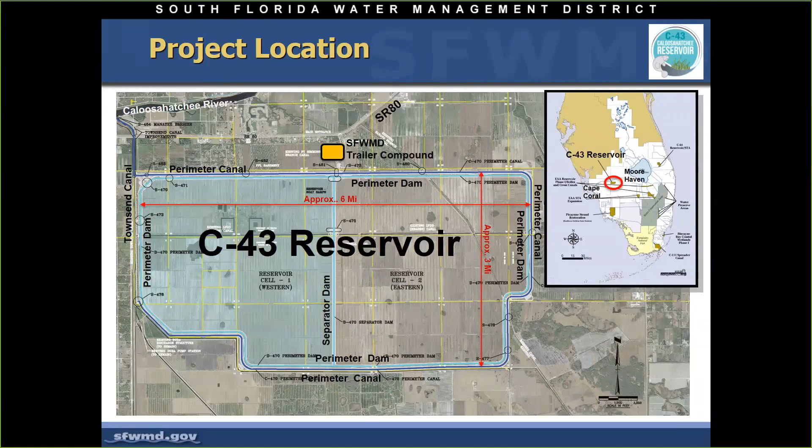The purposes of the C43 reservoir as authorized is to capture excess basin runoff and releases from Lake Okeechobee. That will be primarily during wet season, unless we have an unusual storm during dry season, in which case we would also capture if we have available storage. The intent is we will grab it and store it when there's excess flows, and then when we get into dry season, we will hopefully be able to release water to the degree that it actually improves the timing and quantity of fresh water flow to the Caloosahatchee estuary, the goal being to improve that fresh saline mix so that we begin to restore that habitat back to a healthier system.

In addition to those two purposes for the reservoir, we also have the purpose of maintaining allocated water supply to the local agricultural areas. That will not utilize reservoir water to do that. We will actually do that via the perimeter canal. We will pull water out of the Townsend Canal, put it into the perimeter canal, which will then be the vehicle by which we deliver those permitted agricultural uses.

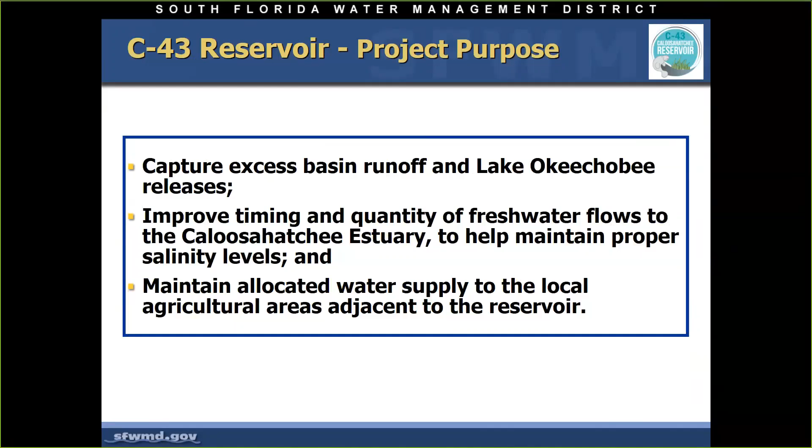In terms of background, we started this project when the Comprehensive Everglades Restoration Plan began. That means we started planning in basically 2001. The project implementation report, which lays out what we're going to do, why, and gives a good cost estimate, was approved in 2010. That was done concurrently with the initial design documents completed in the 2007-2008 timeframe.

We did have to update those designs before we could go to construction because of changes in regulation, not because of anything else. The actual project was authorized, not appropriated, but authorized by Congress in 2014, and we signed our project partnership agreement with the Corps of Engineers in 2016. We actually started work prior to signing that agreement, in 2015. Through the authorization, the entire project is part of the federal project.

In terms of the actual components of the project, there's the reservoir itself, which is 10,500 acres and will hold 170,000 acre-feet of storage. It's got two cells because we put a separator dam into it, so when the wind starts to blow, we don't get a lot of wave run-up that could damage the dam itself. There are 19 miles of embankment, including perimeter as well as the separator dam.

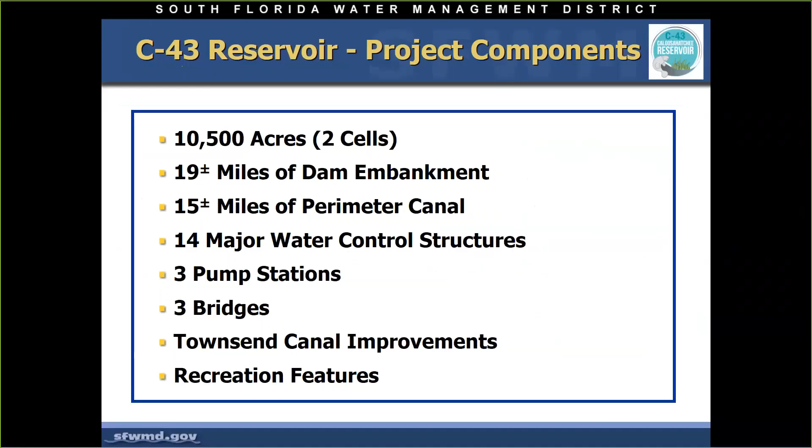Unlike any of the other CERP projects, this one does have authorized recreational features associated with it, so we will be constructing recreational features as part of the project. That recreation will primarily be hiking, biking, and kayaking in the perimeter canal. There will be a boat launch into the reservoir, however it will only be accessible when there's water in the reservoir. There will also be an information kiosk, and shelters along the top of the dam so that if you get caught in a rainstorm, you have a safe place to go.

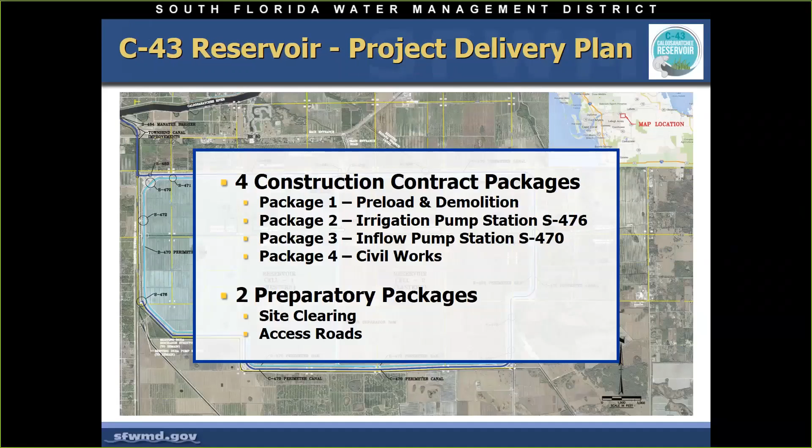Project delivery: in order to move this project forward to construction, we broke it down into 4 construction packages and 2 preparatory packages. Now I'm going to go through each one of those individually.

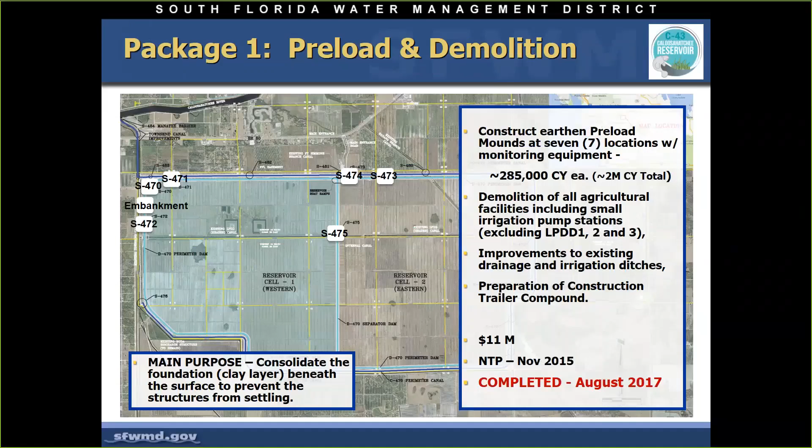The first one is preload and demolition. It was originally issued in 2015, and that work was completed in late summer 2017. The function and purpose of the preload and demolition contract was to get rid of all the different sheds and pump stations, et cetera, that were on the site. This is an old agricultural site, so we had a lot of infrastructure that had to be torn down and removed. We took care of all of that.

In addition, we built what are known as preload mounds. We constructed 7 of them, actually 56 feet high - the highest spot in Southwest Florida. They're slowly coming down, but it was the highest spot in Southwest Florida. On a clear, cold day, you could see all the way to Marco Island. So it was kind of interesting.

The whole purpose of these mounds is that there's a clay layer underneath the reservoir, which is exactly why we chose this site to construct an above-ground reservoir. However, clay, unlike sand, holds water, and when you start putting weight on it, it will compress. In order to have it compress where we are constructing structures within the dam itself, we wanted to make sure we compressed it before we started constructing the dam, so we didn't build a dam only to have a structure drop 4, 5, 6 feet below where we wanted it to be sitting. That's the primary intent of the preload package.

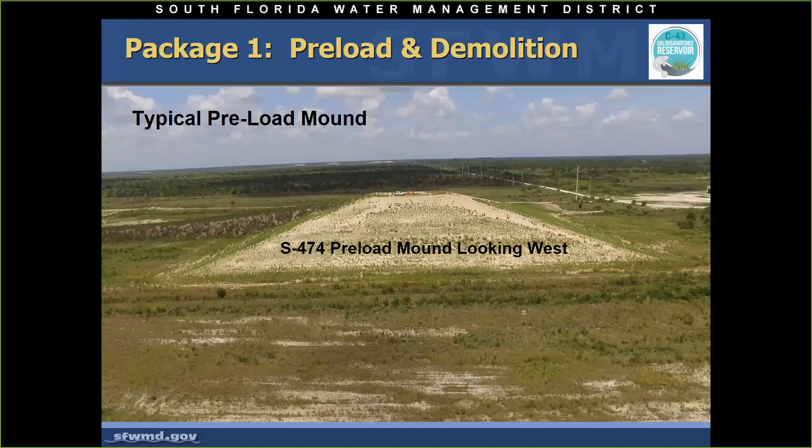The second package was the irrigation pump station - the pump station that I mentioned earlier that would pump water into the perimeter canal in order to deliver agricultural supplies permitted to adjacent landowners. In addition, the perimeter canal serves a couple other purposes. We are actually bisecting what's known as the Roberts Canal, so we are grabbing it, putting it into the perimeter canal, routing it around the east end of the reservoir, and then putting it back into the Roberts Canal in order to maintain historical flows there.

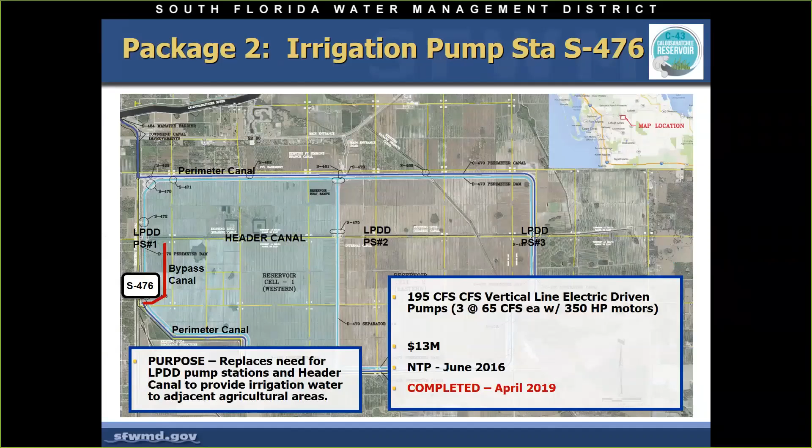The small pump station is 195 cubic feet per second, located in the southwest corner of the project along the Townsend Canal. The notice to proceed for this project was in mid 2016, and it was just completed in April. So we are making progress on the reservoir - it's just that we're doing it in pieces.

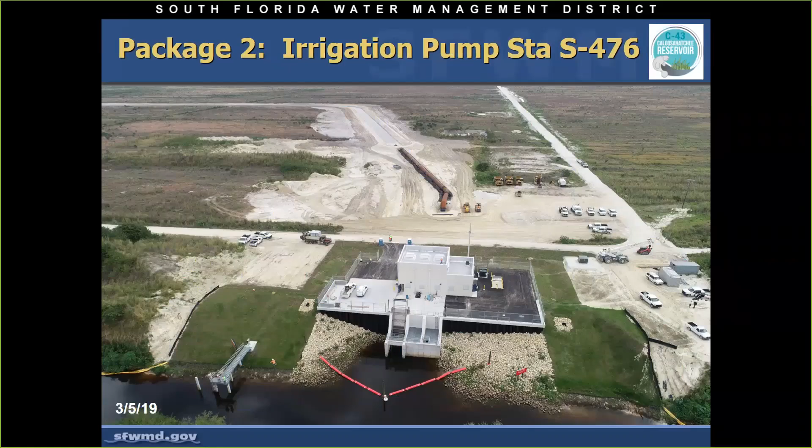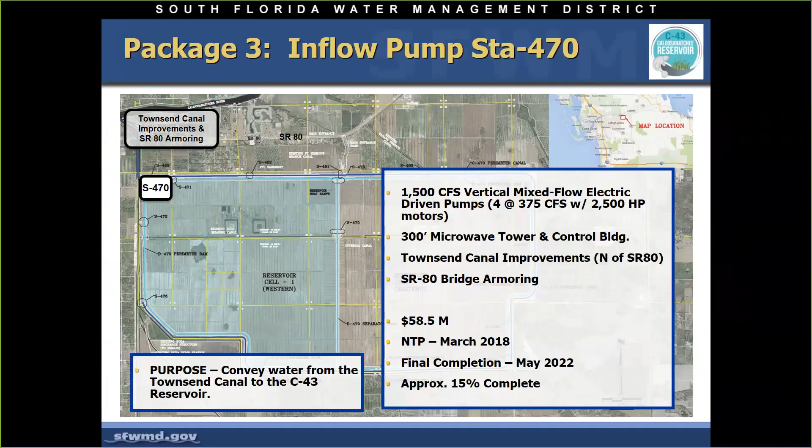The third package is actually what we call the inflow pump station. That's our big pump station that will lift water out of the Townsend Canal into the reservoir itself. Why are we using the Townsend Canal? Because the property that we acquired is along the Townsend Canal, which is directly fed by, or directly feeds to, the Caloosahatchee River. So we're only about, I would say, not even a mile, maybe a mile up from the river. So the inflow pump station, we let that contract in early 2018 with a notice to proceed in March.

This large pump station is in the northwest corner of the project site, and as you can see, there are multiple pieces and aspects to it. Because we don't want different materials of different kinds ending up in an area where they're not best suited for, we actually have to separate all of the material, hence all of the stockpile points.

This is the actual station site itself. And then the intake will be right here into the Townsend Canal, which is here. This is north, so the intake will pull water right out of the Townsend Canal into the reservoir, which will run right here. And then this is the north boundary, and this is the west boundary.

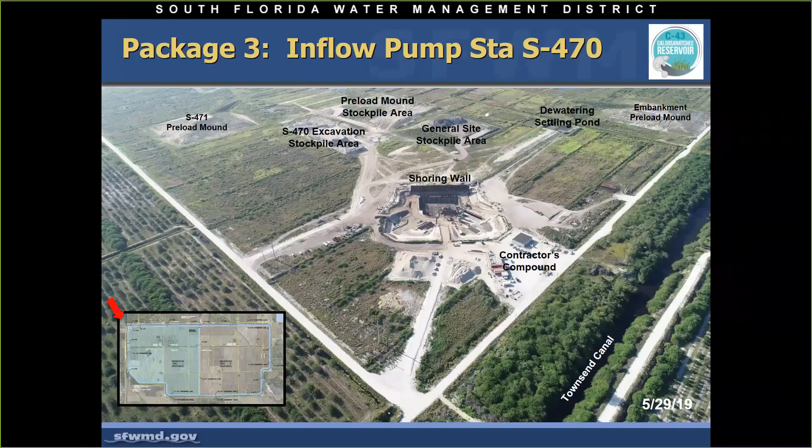And this is a more current picture, this was just taken last week, actually. This dark area right in the center is the portion of the pump station that will be below ground. Our pump stations, when we build them, for those that have never experienced going into one, you'll see a whole lot of concrete above ground, but there's an equal amount of concrete below ground. So they're very large structures.

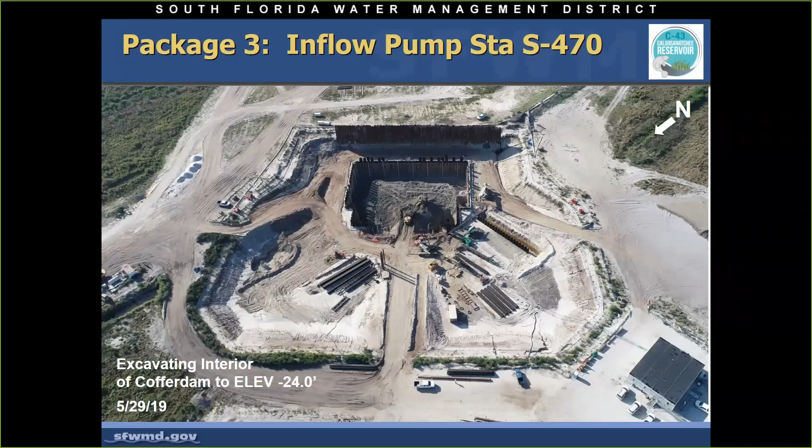In addition to building the inflow pump station, we are actually having to do improvements to Townsend Canal. Why are we having to do improvements? Because we're going to be pulling a lot more water through the Townsend Canal than currently is pulled through it. We are sharing the canal with an agricultural area, so it's critical that we not disrupt their ability to withdraw water as they are legally permitted to do, or to discharge water as they are legally permitted to do. So that's a critical aspect.

So in order to ensure that if we ever had to pump at the same time for some reason, which is highly improbable but could happen - because remember, they irrigate in dry season typically, and we will be releasing water in dry season - however, we won't have to worry about them getting that water, because we will operate such that they aren't pulling water at the same time that we're releasing water. So that is a concern that we will handle operationally. And during wet season, we'll be filling water, and they're most likely to be discharging water at that point.

This is State Road 80, this is the Caloosahatchee River, and this is construction that's just about to finish up in terms of the north portion of the Townsend Canal.

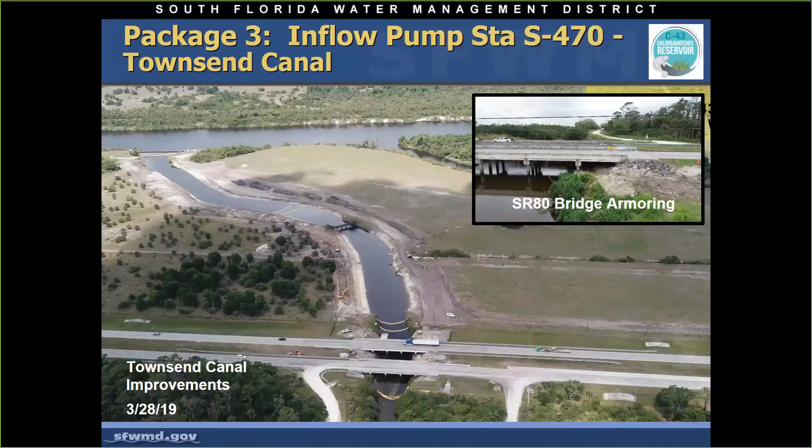This weir structure is currently being demolished, and we are doing reinforcements underneath the State Road 80 bridge, because we will be increasing the capacity to the maximum design capacity of that bridge, and we will also be doing considerable riprap, etc., shoring up so that the flows don't create any problems for the bridge itself.

I mentioned we had two preparatory contracts as well. Preparatory contracts are for the actual dam construction, they weren't needed for the pump stations. So the preparatory work's intent was to clear the site of all the trees, etc. We cleared all of the citrus off, probably in 2009 I believe it was. But in the meantime, all kinds of cabbage palms and small oaks, etc., grew up on site.

So we actually had to clear the site again. So in order to make sure that wasn't a responsibility of the contractor that won the dam work - we wanted them to go straight to work doing the dam itself - we went ahead and issued a contract to help clear the site. In addition to site clearing, we had two specific areas there.

This area and this area actually had to be remediated. There were old agricultural chemicals there in such a concentration that it had to be removed. That work has been completed as well.

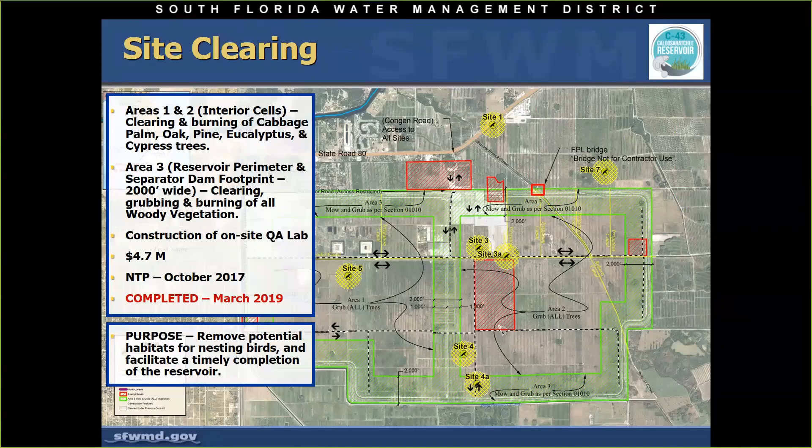This area, we discovered or were told about barrels that were buried there. You can imagine the panic in our hearts when we heard that there were barrels buried there. We had a contractor go out and assess the barrels, and we were most grateful that they were barrels used to import frozen concentrate back in the 80s, or maybe early 90s, when there was a particularly bad freeze. There's a juice plant just to the north of us, so they imported concentrate to produce juice, and that's where they buried the barrels. That was quite the relief for us. We did have to get rid of the barrels, though, but at least it was just concentrate.

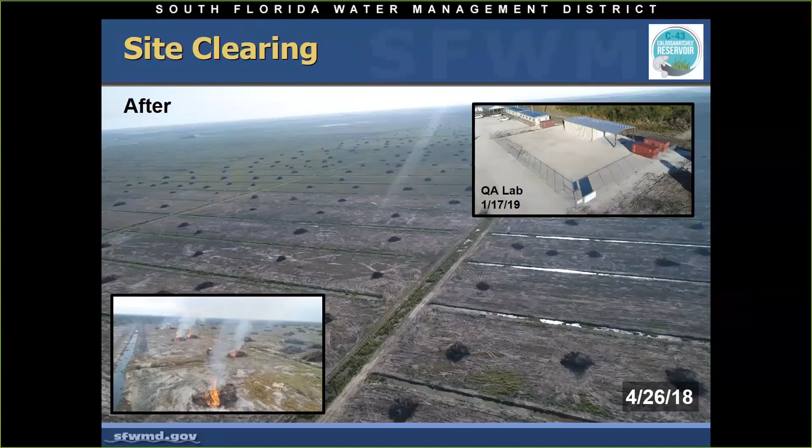In addition to the site clearing, once we got the site cleared, we decided it would make a lot of sense to go ahead and put in access roads. The only way to access the site was through basically two-rut roads through lots of sugar sand, real prone to getting stuck. So we had about 16 miles of shell rock road put in that allows the dam contractor to move all of his equipment around and get to the various parts and ends of the site. As I was told at lunch today, we actually do have a posted speed limit because of a wealth of threatened and endangered species on site that we have to be very careful of and manage for. So it actually takes an hour to drive the boundary of the site. It's a huge site.

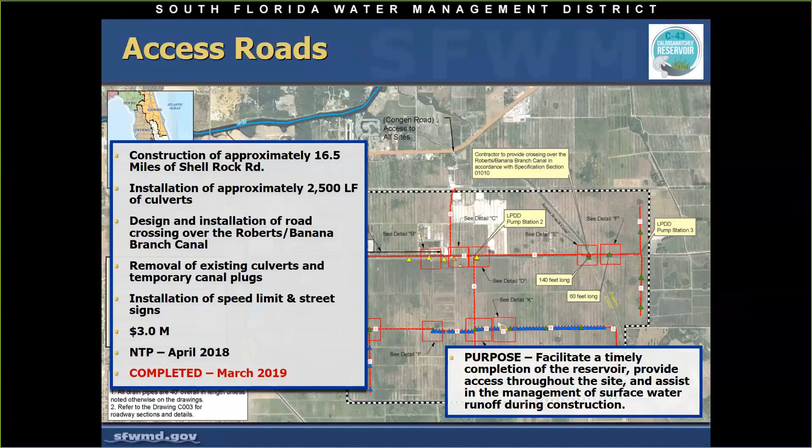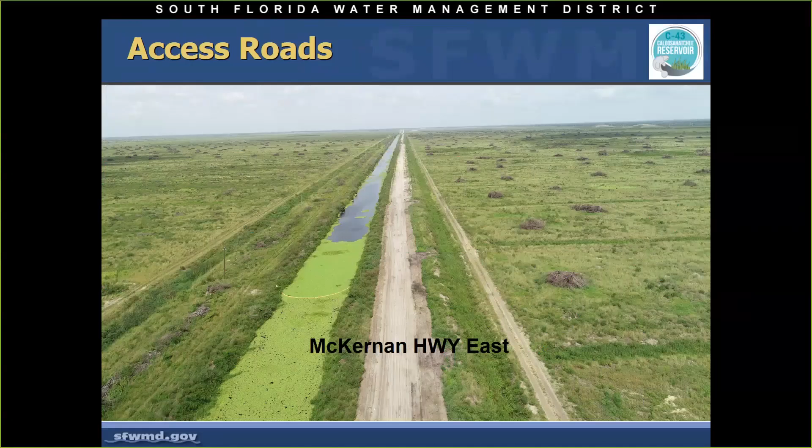In addition to putting in the shell rock roads, the contractor did remove some additional vegetation that was identified as needing to be removed. That is actually the comparison of what was there versus what we have there now. And this is actually aquatic weeds, not algae.

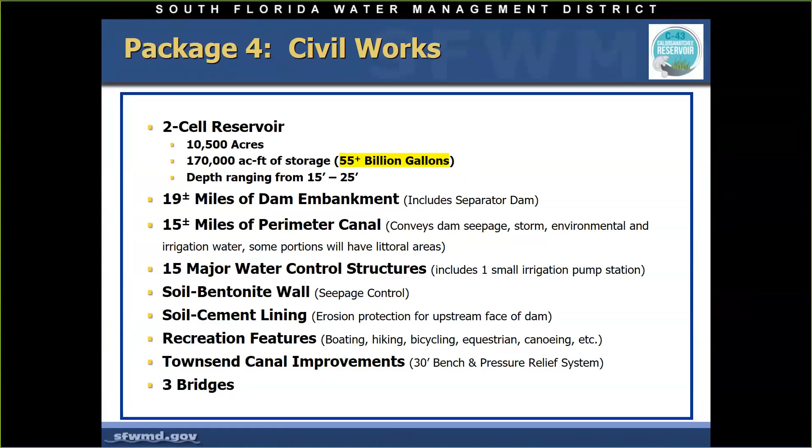Okay, so the big important package is the actual dam construction itself. As I mentioned earlier, it's 170,000 acre-feet of storage, for those that can't understand what that is—and trust me, it's taken me a very long time to understand what acre-feet of storage really looks like. It's 55 billion gallons of water. This contract was actually issued back in March, and the notice to proceed, which means the contractor's mobilizing to site, was actually on Monday.

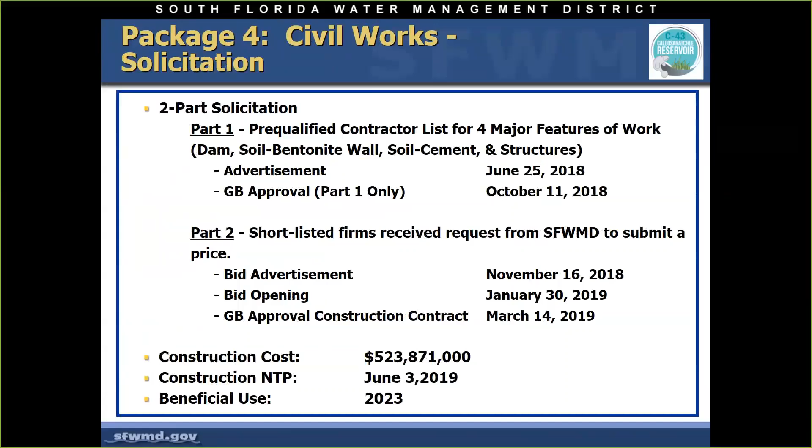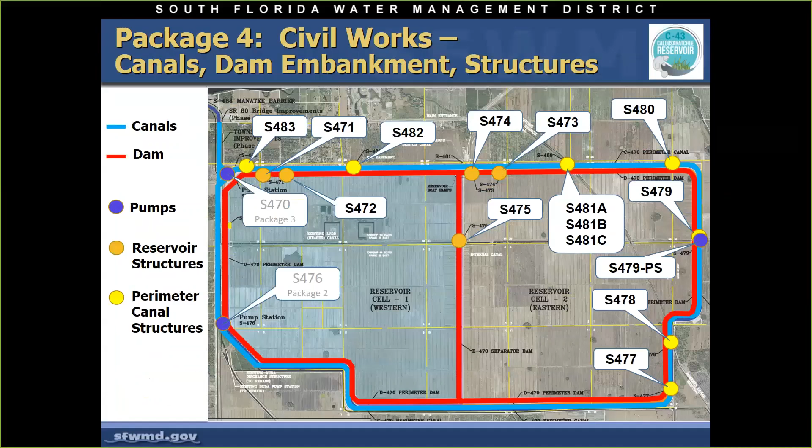Oops, wrong way. Roland.

Good afternoon. Thank you very much for giving me the opportunity to talk a little bit about what Lee County is doing in terms of projects in the Caloosahatchee Basin. As far as their applicability or scalability to the C43 reservoir water quality component, that remains to be seen, but at least it gives an idea of some of the things that can be done in the basin on a much smaller scale.

So we're going to go through this—you've seen a lot of the water quality impairments and sources of pollution, such as what we're looking at most of today, so I'll briefly go through that. We'll do a little project tour of some of the projects we've done, and then there will be a slide on some observations we've made.

As you've seen earlier, Caloosahatchee is impaired not only for nitrogen but also fecal coliform. We have the TMDL and the Basin Management Action Plan, which dictates a lot of the water quality initiatives in Lee County. We also realized that identifying the sources is very important, so we've done joint work with DEP as well as Harbor Branch for on-the-ground truthing, water quality sampling, groundwater sampling, and surface water sampling to get more definition of where the problems are coming from.

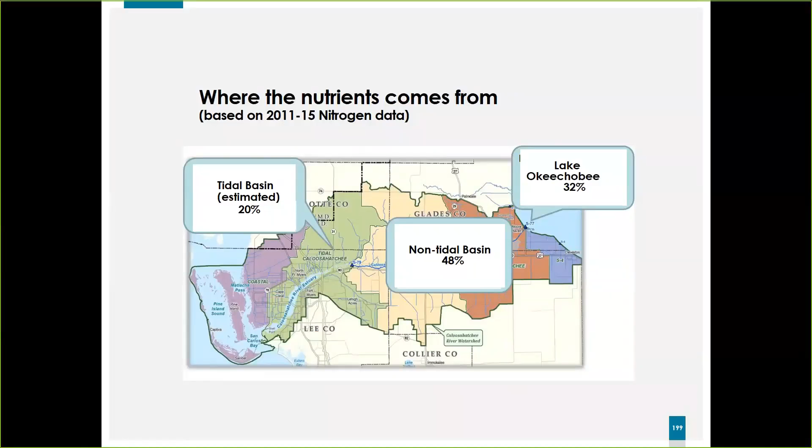This is a graphic showing the distribution of our projects in the county. As expected, they align along the Caloosahatchee, Estero Bay, and some actually treat water going out to Charlotte Harbor.

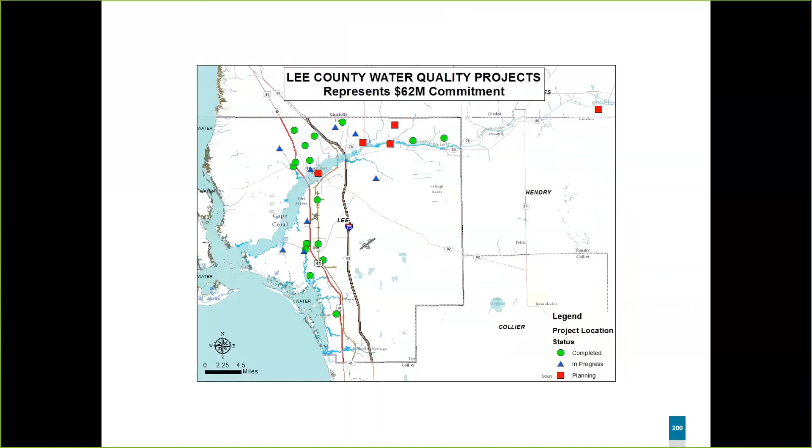Just a brief overview of some of the projects, a walking photo tour here. A couple we've completed before that you've probably seen - Powell Creek Preserve, a 20-acre filter marsh constructed between two mobile home parks in North Fort Myers, cleaning up an area that many years ago had no stormwater treatment. It goes through a series of treatment marshes and then into a canal out to the river. It's designed to remove about 1,200 pounds of total nitrogen per year.

Again, this is a design for Popash Creek Preserve - this is an old mine pit, a 307-acre parcel of land. About 3,700 acres contribute to that, mostly agriculture.

That's designed to remove about 6,600 pounds per year of total nitrogen. Most of these have DEP grants, excuse me, and they require monitoring, so we have a monitoring database on these. But like many of these things, you need to keep monitoring year after year. The variability you get is all over the place, so it's hard to just pick one year or one season and say this is the performance. It's important to keep up with the monitoring so you can identify what kind of efficiencies you are getting.

Victor's Creek, this is a 53-acre project, 760-acre park. You probably recognize this as the mountain bike trails in the Caloosahatchee Creeks Preserve area. We built basically some dry detention and wet retention, designed only to remove 8 pounds of total nitrogen per year. It's about a 4,800-acre watershed that contributes to that.

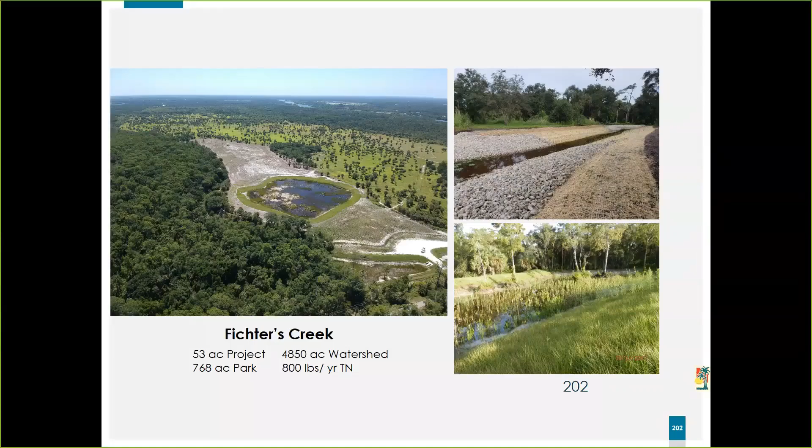Prairie Pines Preserve, this is a large parcel we purchased through the Conservation 2020 program as well. 2,600-acre preserve, mostly mesic and wet flatwoods. It straddles two watersheds, Powell Creek and Daughtrey's Creek, where their headwaters meet in this parcel of land. Primarily what we've done there is restore the hydrology in the region, filling in ditches, reducing berms, trying to get the natural flow moving through there.

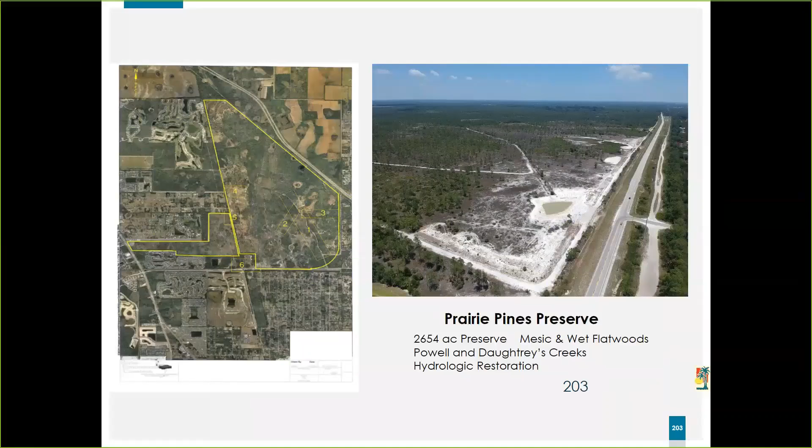This is just a recent photograph of us cleaning up some of the southwest corner of the park. We get TMDL credit just by restoration. It doesn't have to be a full-blown bona fide water quality treatment project, it's just restoration in itself. It's going to attenuate water, cleanse the water before it's released to these creeks. So we like activities like this because it's a very disturbed parcel of land, and we're able to make it somewhat resemble what it was historically.

This is one under construction right now. This is a construction photo from the other day. Nalle Grade Stormwater Park, North Fort Myers. It's an existing 77-acre park, about a 720-acre watershed, and it's designed with 1,350 pounds of total nitrogen.

Let's see, what was that? Sorry.

So the water basically moves into this retention facility first. It goes into dry retention or detention, and then it overflows into this. This is a very disturbed wetland, so we're able to rehydrate this, and then it has an outfall structure that returns it back into the Bayshore Creek.

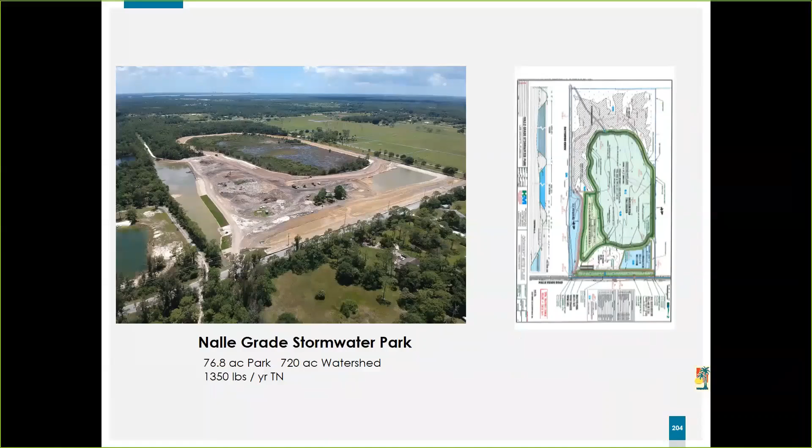And that design right now is underway. We're doing several feasibility options to see what we want to go with. So that's well underway in terms of feasibility.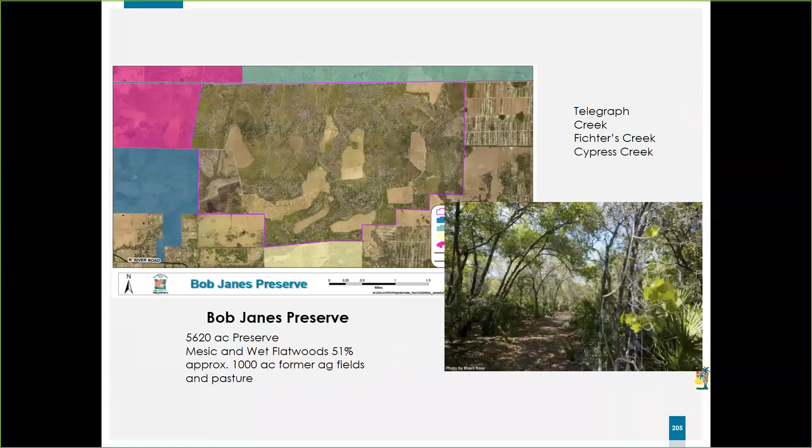Then more recently, we purchased this Olga Shores parcel, 92 acres just west of I-75. It's across from Devil's Elbow and the Caloosahatchee, if you're familiar with the Caloosahatchee River. This is actually a graphic done by an engineer like me, so it's probably not going to look like that when we're all done. But we're basically going to create a treatment marsh in here, and also provide recreational and other amenities on the property as well. So this is just a concept that we're throwing around a little bit right now.

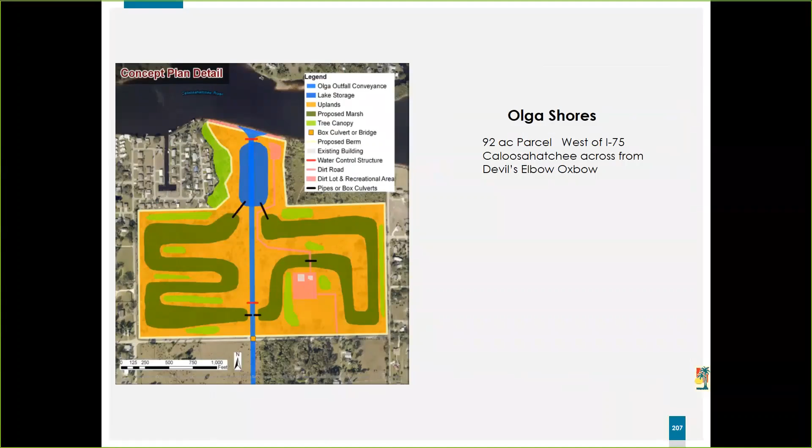Some observations we've made over the years when we've done these projects: a lot of it is highly dependent on location within the watershed. There are parcels of land out there, but if you're not close to the conveyance, you need a collection point.

Availability of flow and how much it varies matters. You've got to be able to capture the water. Are you just getting it during peaks, or is there a base flow that you can capture?

The existing water quality condition matters too. If it's really clean now and the concentration of TN is 1.1, are you going to bring it down to 0.8? It gets to the point where it's very difficult to remove that last little bit of concentration. So the idea is to find the most polluted areas in your watershed, capture that, and you'll realize much greater benefit.

As for the technology used, mostly filter marshes, retention, detention, not a lot of high tech there. We have experimented with some ideas with alum and also UV, but we haven't grown to the point where we'll actually implement those at a larger scale.

The age of the system is important. When we first plant these, you get the initial grow-in of the plants - they really like to suck up those nutrients. But you can't just let them sit there and die and decay, because it puts that biomass back into the system. It requires a decent frequency of maintenance so new crop roots are taking up those nutrients, and also taking up some metals as well.

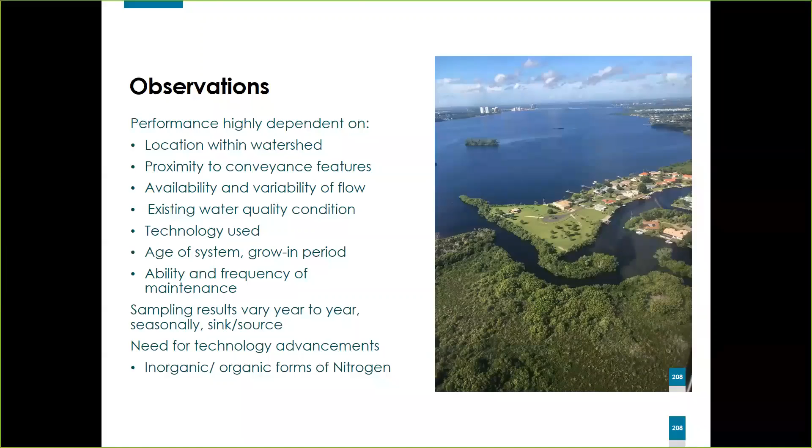Now you're going to hear a whole lot about inorganic and organic forms of nitrogen.

I wanted to really thank Dr. Knight - he did a great job setting up the context for the project I'm about to present. If you remember one of his slides, there was a diagram with field scale cells, test cells, and mesocosms. I'm the mesocosm chunk of that diagram. We are essentially phase one of what was to be a large 20-year project, but as you've heard many times today - money. We're at a pause point; we're not going to scale up just yet. We're hoping budget comes along, but this is phase one of the water quality treatment and testing project.

We are going to get into a deep dive into science. I'll try to keep it as light and airy as possible, but put your thinking caps on.

As you've probably heard a million times today, the Caloosahatchee is impaired for total nitrogen by the DEP. What you might not know is that almost 80% of that total nitrogen is in what's called the dissolved organic nitrogen form, and a lot of that is recalcitrant - meaning it's unavailable to the algae, bacteria, and plants in the system. So the majority of the nitrogen in the Caloosahatchee River is actually unavailable to biology.

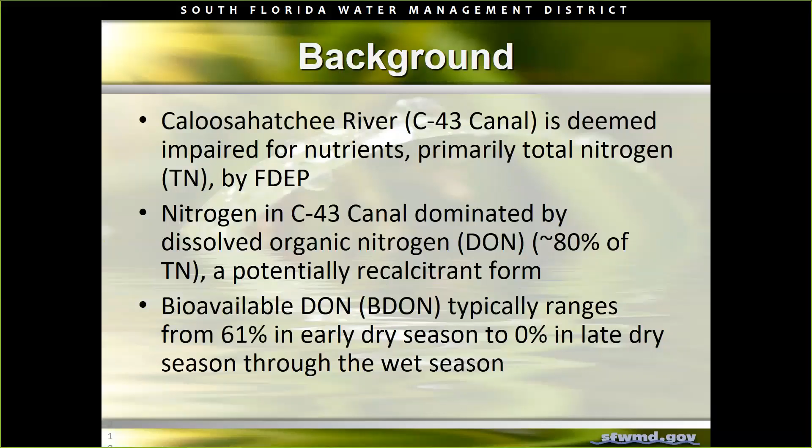We did a study with FIU earlier to look at what the Caloosahatchee's dissolved organic nitrogen component is composed of. The result is that it varies - it ranged from 61% in the early dry season to 0% in the late dry season, and stayed at 0 throughout the wet season. So with our mesocosm, we wanted to test a wetland-based strategy to see if we could remove nitrogen from the system, especially dissolved organic nitrogen, from the C43 canal, also known as the Caloosahatchee River.

We had 3 questions that we wanted to address. What plant community will provide the best treatment performance for TN and DON? The second question was, what contribution will on-site soils have on nitrogen uptake?

Back to Dr. Burkhalter's sediment pump: when you put soil into a system, it flushes out the nutrients in there, and if you're starting with soil that has a lot of nutrients, you're going to get a lot of nutrients coming up into the water column. So we wanted to see what the on-site soils actually looked like in that regard. The last thing we wanted to look at was the hydraulic loading rate, how much water and how quickly you run through a system, and how that affects the nutrient removal rate.

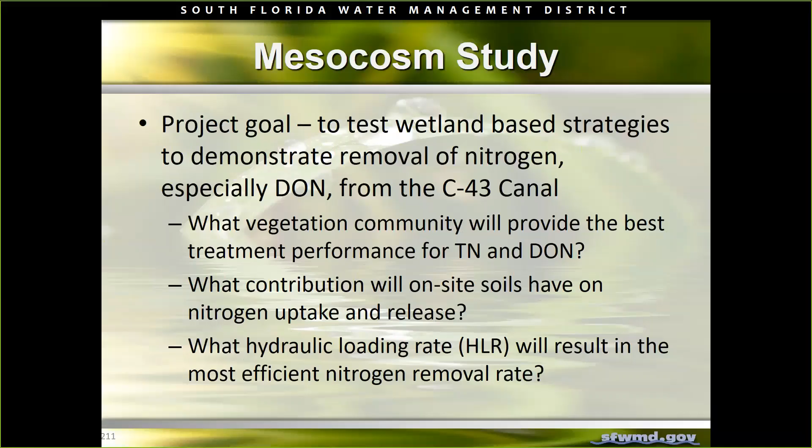For the timeline of the mesocosm study, we started construction in October 2015, finished in June of 2016. Then we did a startup phase, letting the plants grow and come to some state of maturity, the water settled out, and the sediment settled back down. That startup phase ended in December 2016, and then we started operation.

The first phase was batch 1, meaning we stopped the flow through the system and let it sit there. This was to calculate what's called C-star, an assessment of the lowest possible concentration you can get within that water. So there was no flow from January to June 2017.

Then we turned the spigots back on, and that phase ran for a whole year. After that we turned the spigots back off and went into batch 2 for 6 months. The point of the second batch was to see the difference between the new vegetation versus the mature, more fully developed vegetation and soil.

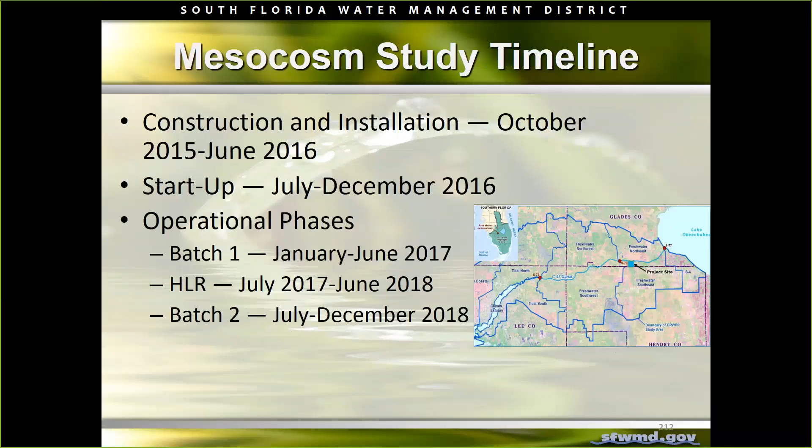Here are our treatments. For vegetation, we had 2 treatments: an emergent treatment and an SAV treatment. For emergent, we had cattail, bulrush, and spike rush. For the SAV treatment, we had southern naiad, chara, and coontail.

For the soil, we had our native soils, but for a small portion of those, we rinsed the soils with hydrochloric acid and hydrogen peroxide to get rid of any labile nutrients that may have been present. That way we could test the effect of the native soil, that sediment nutrient pumping.

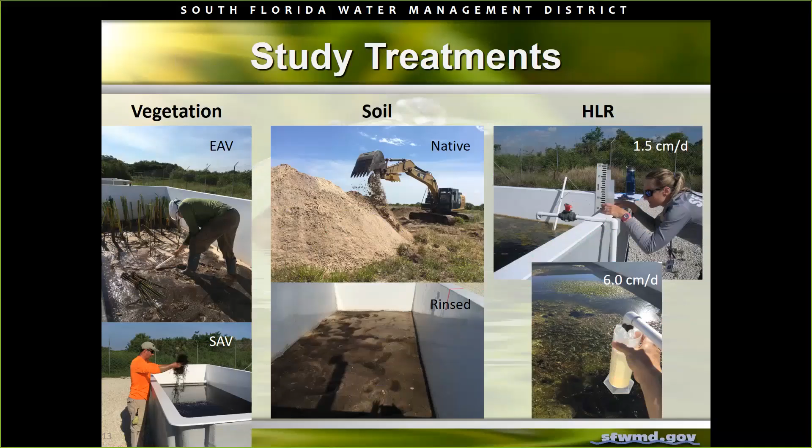For HLR, we had 2 treatments: a low of 1.5 centimeters per day, and a high of 6.0 centimeters per day, which is about the range that our STAs south of the lake receive.

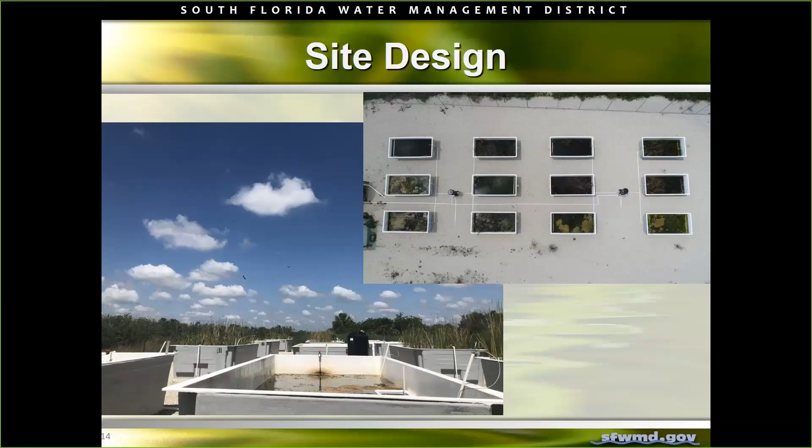We did a lot of sampling in these tanks, including water quality sampling. We collected a large suite of nitrogen, phosphorus, and chlorophyll parameters, as well as physical parameters.

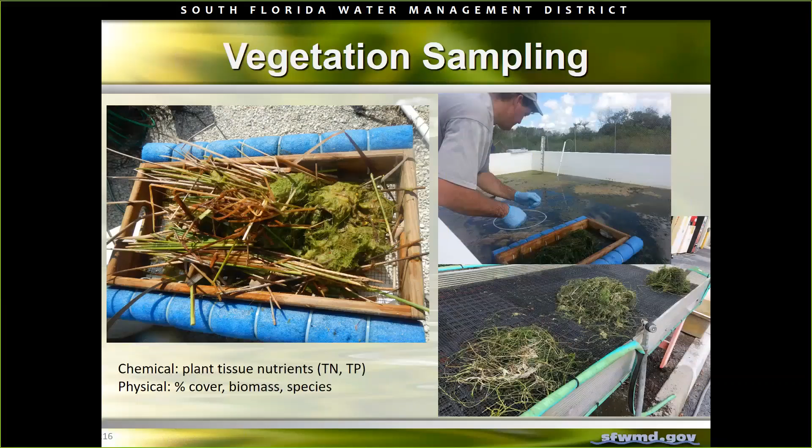For vegetation, we did some chemistry work as well as a biweekly assessment of the percent cover of individual species within the tanks, and periodically did biomass sampling. We also monitored the soil periodically, checking the nitrogen storage in those sediments, along with other parameters.

We also did a couple of side projects. One was the biologically available dissolved organic nitrogen. We took samples out of each of the tanks as well as from the source water, brought them back to the lab, filtered them, and measured the starting dissolved organic nitrogen concentration.

We then incubated the samples with a small inoculum of bacteria found in the water column, incubated them for 28 days, remeasured for DON, and the difference between the two was what was biologically available. That's how we calculated our BDON component.

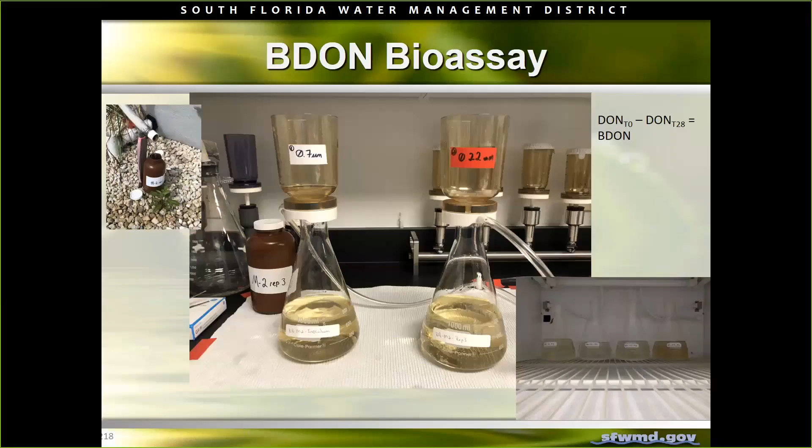That study was run at the very end. It started in April of 2018 and ended in December of 2018. During that period, we actually switched, so we've got 2 samplings in the hydraulic loading phase and 2 samplings in the batch 2 phase.

The tank on the left is clear of periphyton, that's just SAV, and the one on the right is about 20% cover of periphyton. That impacts how nitrogen flows through that system because, one, you're shading the plants below, and two, that periphyton is sucking up nutrients, so you might get a little bit of change there.

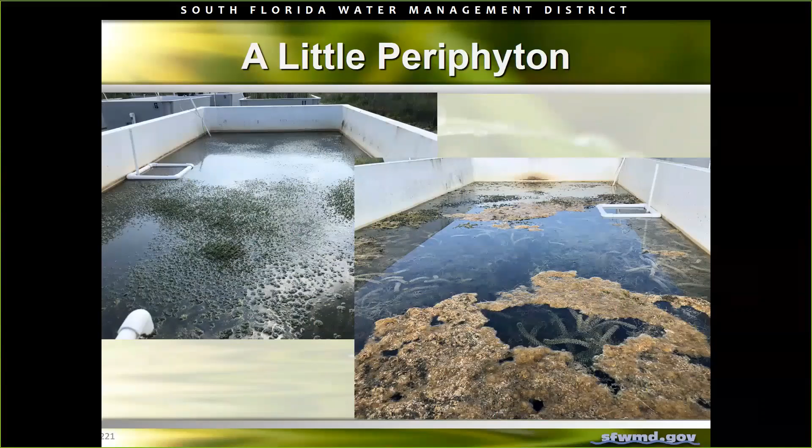And lastly, we had some volunteers to help us with our sampling, so we actually had a lot of wildlife come into our tanks, trying to let us know that our tanks were a healthy system. We found some interesting critters in there.

And so now to get into the data. What I'm presenting to you from this point on is all preliminary data. It is subject to change. We're still working on the final report, so take everything with a grain of salt there.

One of the things that we found was we did all those lovely treatments, but we found no treatment effects between all of them. The SAV and the emergent were equivalent in how much nitrogen they removed. The hydraulic loads, there was a little bit of something going on there, but nothing we could really put a finger on. So these data are all rolled up into one pretty little graph.

This is our head tank or our source water data here, and it's broken into the different fractions of nitrogen. This big blue bar is dissolved organic nitrogen. This reddish one is particulate nitrogen. Green is ammonia, purple is nitrate.

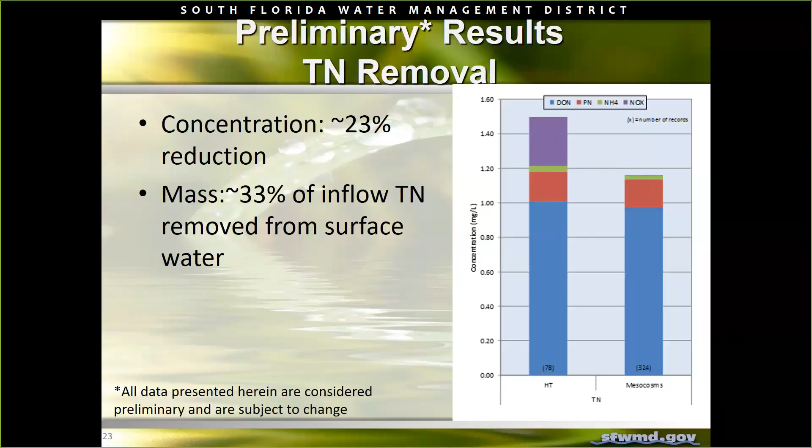Of that tall graph that you saw, the DON component is about 68% of the source water. Overall, we had that tiny reduction, about 4% overall. However, we did a deeper dive into the data, and we were able to find that during the wet season, the concentration reduction in DON actually increased to 14%. Yay, we moved the needle. So we've got something there to chew on. We're excited about that.

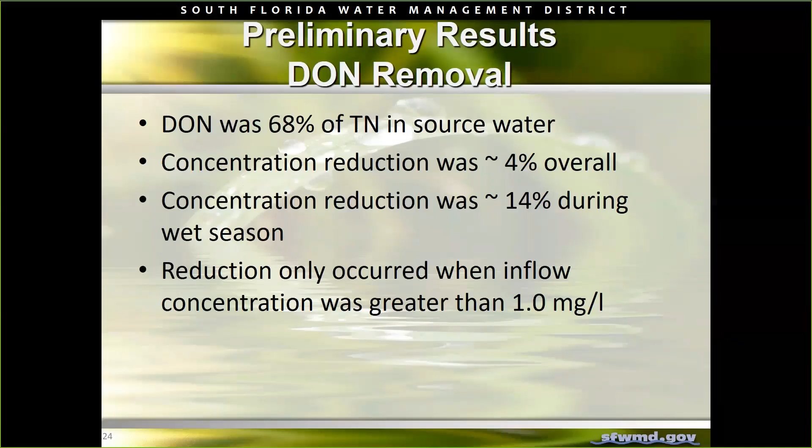However, the reduction only occurred when the concentration was over 1 milligram per liter. So, okay, we're not excited about that aspect.

So these are the results of the bioassays I was working on, separated out by treatment types as well as time. As you can see with the vegetation treatment, the emergents did a little better. This graph shows you the percent of the DON that is biologically available.

What you're seeing is that most of the bioavailability is averaging around 7% of the DON being bioavailable during this experiment. It did range between 0 and 34%, but you can see the error bars, those long sticks off the top of the graph. Those give you an indication of how variable the data was.

What this shows you is that when you look at the vegetation treatment, there's a little bit higher emergents than the SAV, but statistically they're equivalent. Same for the hydraulic loading rate, all about the same.

When you go over to the month, you can see that September you actually get a higher bar of BDON. I think that's because, remember I told you we switched from HLR to batch right here between July and September. Basically we went from a flow-through system to a no-flow system, increasing the residence time during the warmest time of year.

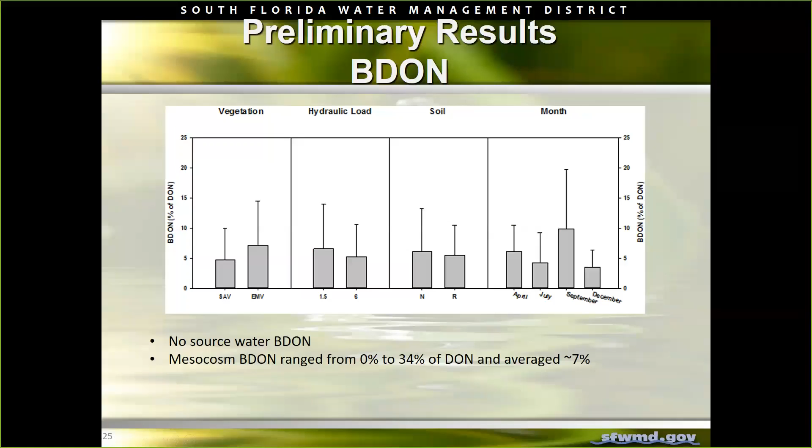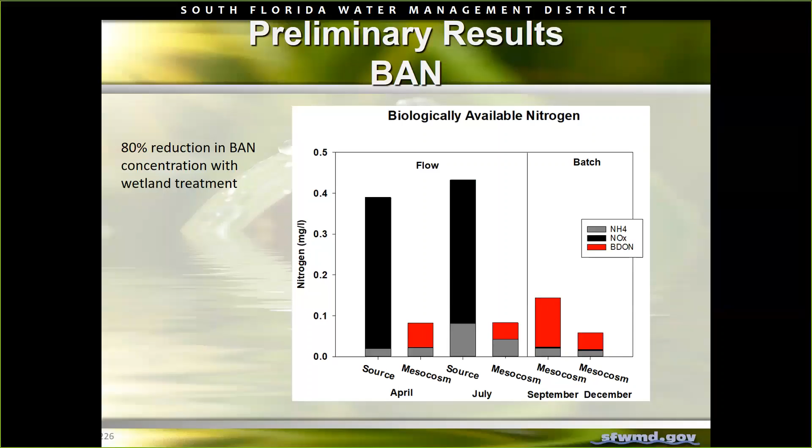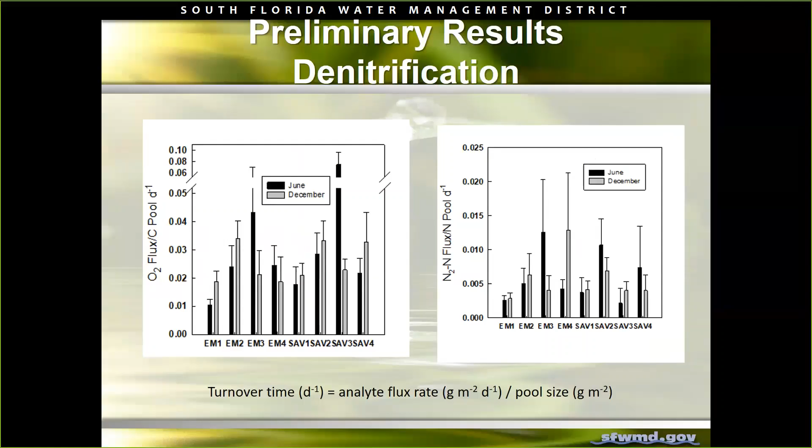It was about 19% of the amount of decomposition that was occurring in the tanks. 19% of that was denitrification. All that nitrogen is getting blown off. It's equivalent to 2% per day. So that's pretty significant. Very happy about that result.

So our initial conclusions are that treatment wetlands are actually effective for removing dissolved inorganic nitrogen from the Caloosahatchee River. DON is still up in the air, but we did find there's a seasonal effect, and that may help us understand how to manage any treatment systems we develop in the future.

The microbial community in treatment wetlands is capable of breaking down the DON that comes in from the Caloosahatchee River. The water column of the Caloosahatchee, the bacterial community in that, is not able to do that. So the fact that once we run it through, we can now make it bioavailable with the different suite of microbes that exist in the wetland versus the water column. And by making it bioavailable, we can then remove it.

And lastly, denitrification is a significant pathway for nitrogen removal, a permanent removal of nitrogen from the system.

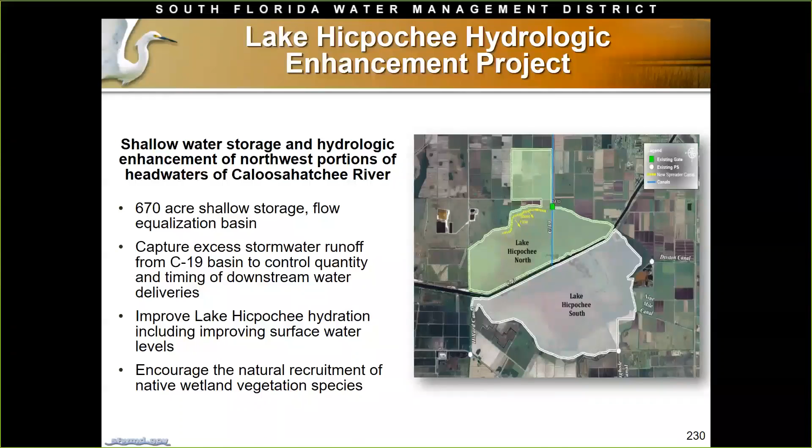The project is located on the north side of Lake Hicpochee. It consists of a 670-acre flow equalization basin, a very shallow reservoir, designed to capture stormwater runoff from the C19 basin, which is largely agricultural, with a large canal running through it. The idea is to pull water out of the canal, run it through the FEB, from there into a spreader canal constructed along the north face of Lake Hicpochee. The water stages up in the spreader canal and flows into Lake Hicpochee, rehydrating it and providing environmental benefits. The project was just recently completed.

For those unfamiliar with the location, Lake Hicpochee is about 3 or 4 miles west of Lake Okeechobee, just outside of Moore Haven. It's a 6,000 acre lake, or used to be. Most of you are familiar with Hamilton Disston, who came to our area and decided to connect the Caloosahatchee with Lake Okeechobee. When he did, he constructed a canal right through Lake Hicpochee, and as a result of this and other practices, the water dropped and we now have a 6,000 acre marsh. The beauty is, since it used to be navigable waters, it's owned by the state, which opened the door for us to do work out there.

You can also see the large C19 canal. It runs all the way from the north near Nicodemus Slough, down along the project, and cuts right through Lake Hicpochee down to the C43 canal, the Caloosahatchee. The lands surrounding it are largely agricultural, and that C19 canal is the source of water as well as discharge for all those agricultural lands.

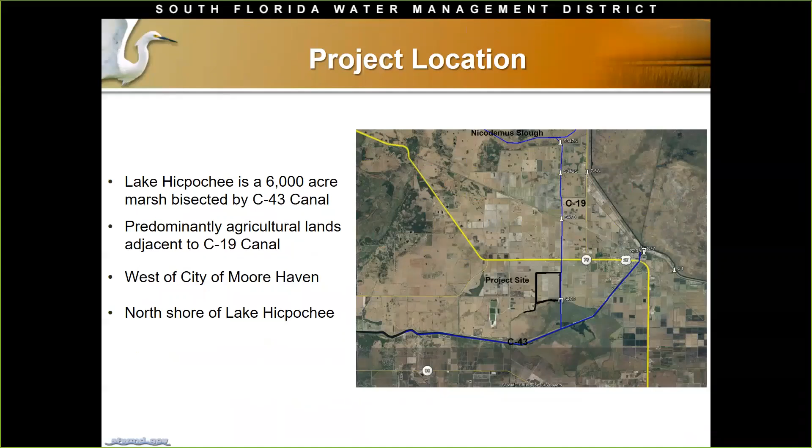The components of this project include the shallow reservoir, a 670-acre flow equalization basin with no vegetation planted, just allowing native vegetation to continue to grow. It has a small pump station with 3 electric pumps, 50 CFS each, located in the northeast corner of the project area. It pulls water out of the C19 canal to fill the flow equalization basin. Water levels are monitored, and when they drop, the pumps kick on to keep water levels at approximately 2 feet.

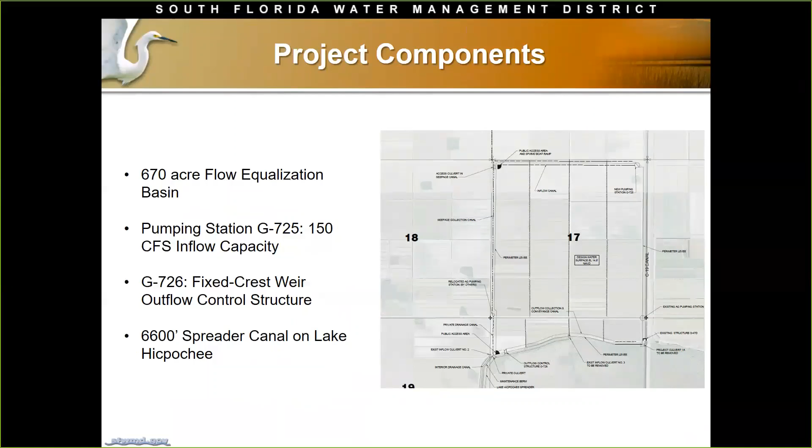From there, the water flows out of a fixed crest weir located at the southwest corner of the property, and into about a 1-mile spreader canal constructed on the north shore of Lake Hicpochee.

Here's a picture of the flow equalization basin while it was being leveled during construction. It's 670 acres in size, with 4 miles of perimeter embankments and some small levees, about 6 feet high - very tiny compared to Janet's great big 18 square mile reservoir with its 35-foot dam. We've got about a 6-footer on this little baby reservoir.

It has a crest width of about 14 feet, and the water depth will be 1.9 feet. All total, it holds about 1,300 acre feet of storage, with 2 miles of seepage canal around 2 sides of the reservoir to capture any seepage and prevent it from getting under the adjacent agricultural lands.

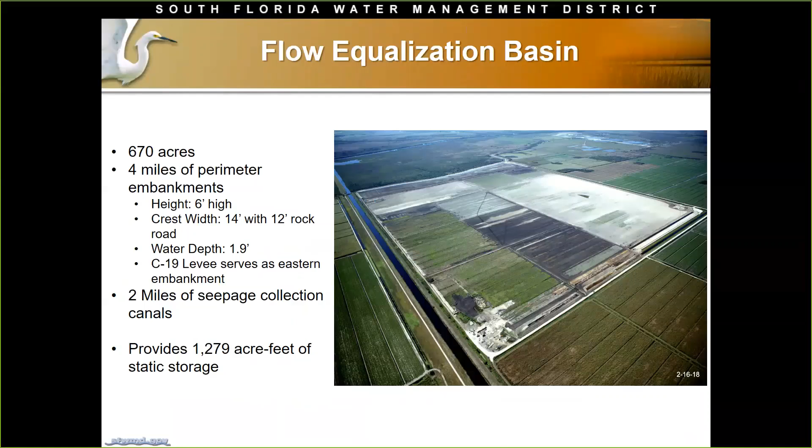This is a picture of the outflow structure, a fixed weir - simply a large concrete box. Water stages up and spills over the sides into the box, flowing underneath the perimeter embankment into the spreader canal, shown here on the right. It's about a mile in length, and the water stages up in there at a certain elevation. The spreader canal is just a large canal capped on either end.

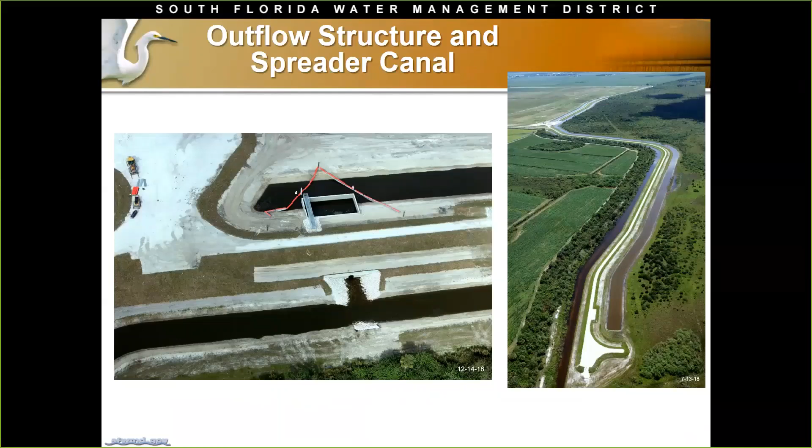It's designed so the water stages up in there, and when it reaches a certain elevation, it spills over the southern end of that canal. The water flows right over the southern edge onto Lake Hicpochee, and then makes its way sheet flowing down into the Caloosahatchee, or the C-43 canals.

Here's what it looks like completed, while we're in the process of testing it. This is the east corner looking towards the west at the inflow structure. As I mentioned, that's three small pumps in there. Then there are two other smaller pumps that will pull water out of the spreader, or the perimeter canal located to the right, in the event that it gets too high.

Down at the southern end, you're looking at the southwest corner, looking towards the northeast, where the outflow structure is and where the spreader canal is. You can see it's probably about half full right here, with maybe a little over a foot of water in it. I was out there about 3 weeks ago, and it's already filling up with lots of birds and a lot of wildlife. I'll mention this project will be open to the public for recreational purposes.

We have a small boat ramp at the north end of the project where you can put kayaks in. I don't think you'll be able to put any boats in there with only 1.5 to 2 feet of water, but you'll be able to bike and hike along the perimeter, and it should be some outstanding birding, I would think.

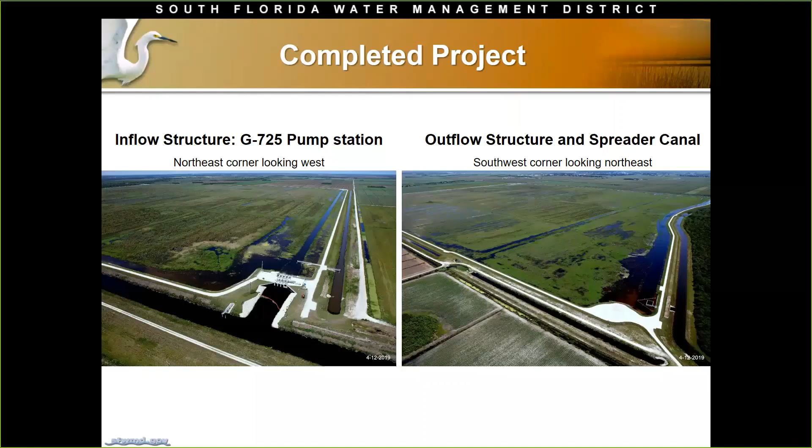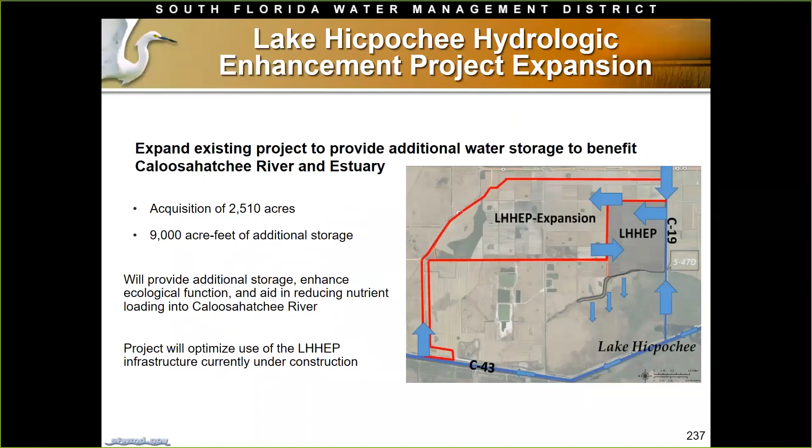As if this project is not great on its own, there's more good news. We've acquired another 2,500 acres of land immediately adjacent to it, which has the potential of providing an additional 9,000 acre-feet of storage. We'd get funding to move forward with future design and a feasibility study of the most appropriate use of these lands, then incorporate it into the project. The structures that were constructed, the pump station, outflow, and spreader canal, were specifically designed to accommodate additional flows, so that won't be a problem. We're looking forward to expanding this project in the future.